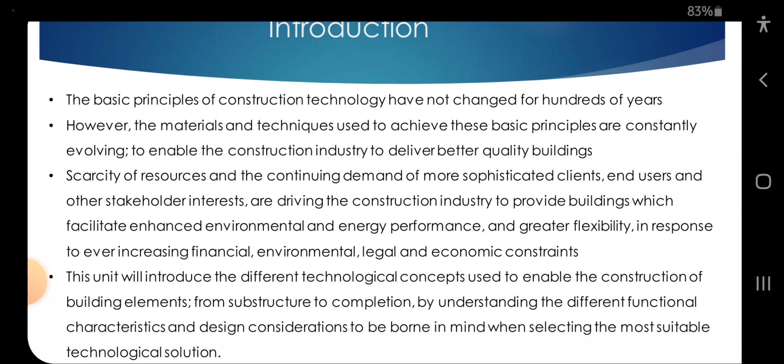Introduction. The basic principles of construction technology have not changed for hundreds of years. However, the material and techniques used to achieve these basic principles are constantly evolving to enable the construction industry to deliver better quality buildings. Scarcity of resources and the continuing demand of more sophisticated clients, end users and other stakeholders' interests are driving the construction industry to provide buildings which facilitate enhanced environmental and energy performance and greater flexibility in response to ever increasing financial, environmental, legal and economical constraints. This unit will introduce the different technological concepts used to enable the construction of building elements from substructure to completion by understanding the different functional characteristics and design considerations to be borne in mind when selecting the most suitable technological solution. Okay, the construction industry, the term construction has not changed.

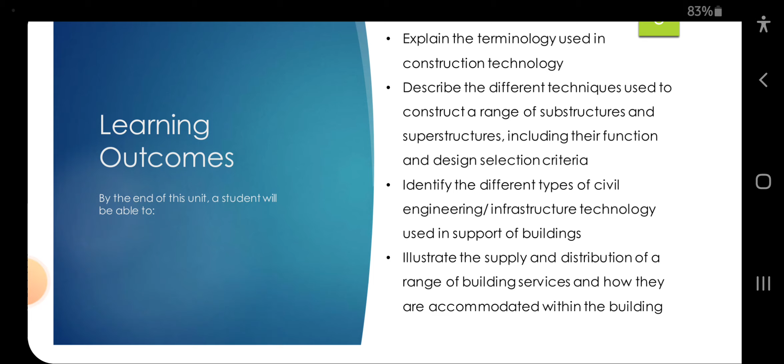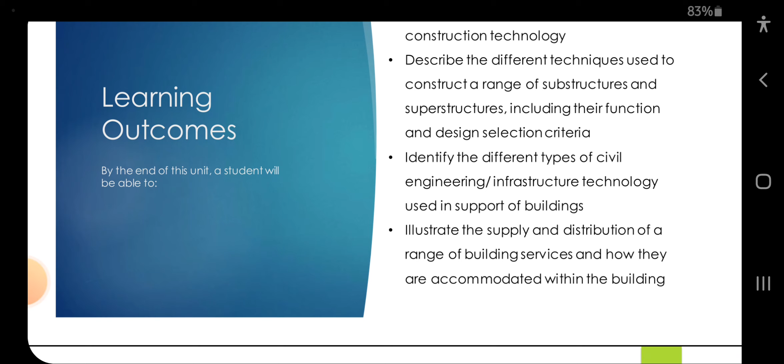Okay, the first most important word in this unit is building. Okay, what do you mean by a building? Permanent or temporary structure consisting of foundation, wall, floors, roofs, ceiling, windows and doors. Permanently positioned in one location. The aim of a building is to give shelter along with security, to protect from wind, rain, solar radiation, snow and so on. Buildings can be load-bearing masonry buildings, reinforced concrete or steel frame structure buildings, or timber structure.

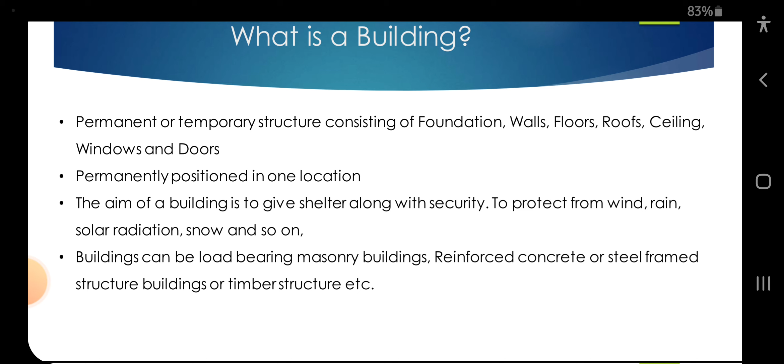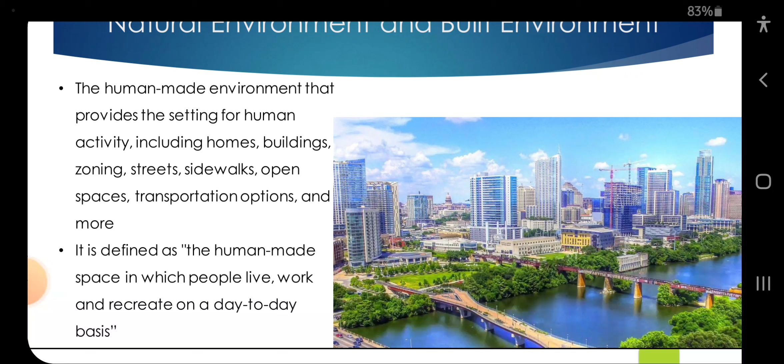Natural environment and built environment. Okay, the human-made environment that provides the setting for human activity, including homes, buildings, zoning, streets, sidewalks, open spaces, transportation options, and more. It is defined as the human-made space in which people live, work, and recreate on a day-to-day basis.

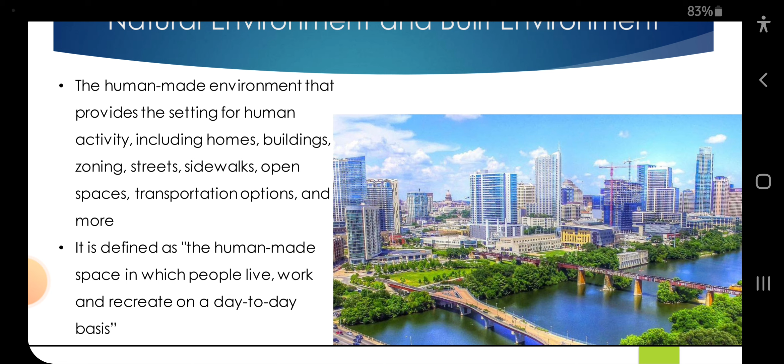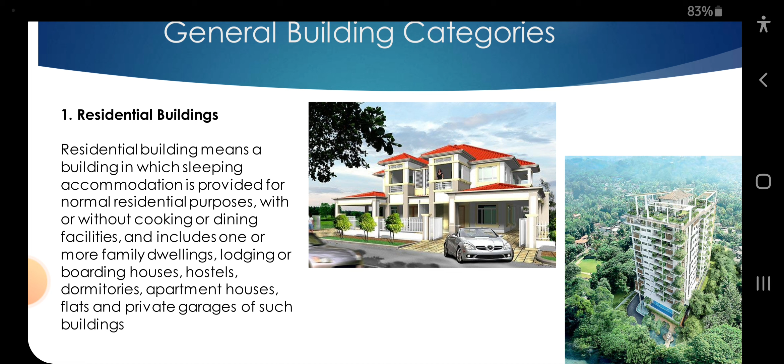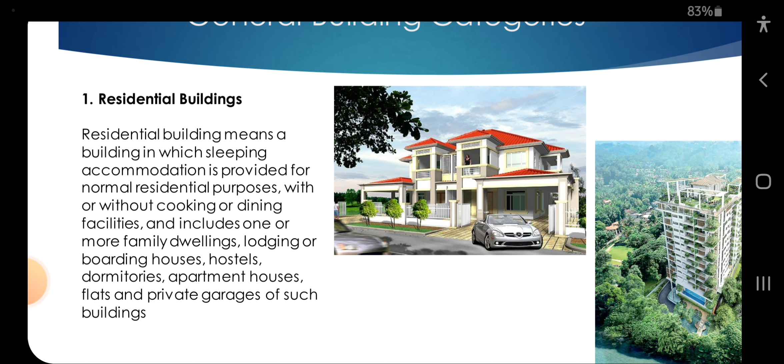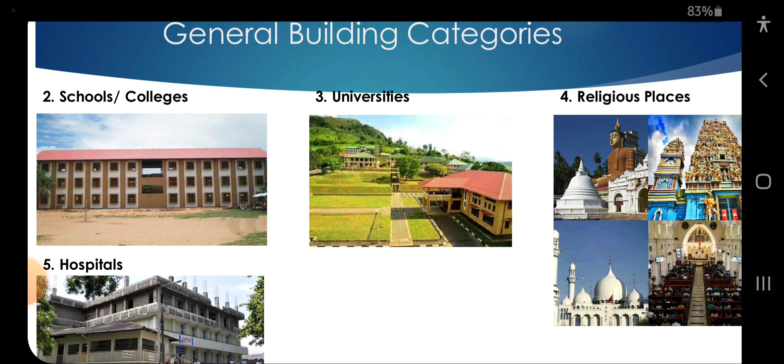General building categories. Okay, let us see some building categories, type of buildings. Residential building. Residential building means a building in which sleeping accommodation is provided for normal residential purposes, with or without cooking or dining facilities, and includes one or more family dwellings, lodging or boarding houses, hostel, dormitories, apartment houses, flats, and private garages of such buildings. Other than that residential buildings, we can identify few other categories like schools or colleges, universities, hospitals, and religious places. Okay, let us come to commercial buildings.

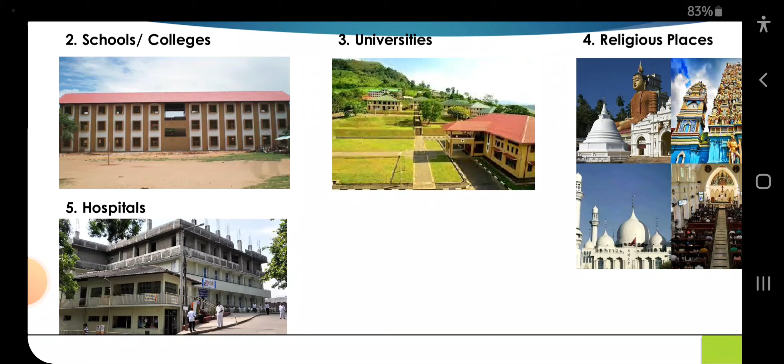Again, commercial buildings are buildings where commercial activities take place. Its floor space is used for commercial activities such as retail, the providing of services, or food services such as restaurants and hotels.

A commercial building or land may also be defined as a space that has the potential for being one that brings in income. If any land or building generates income, then we regard this as a commercial building.

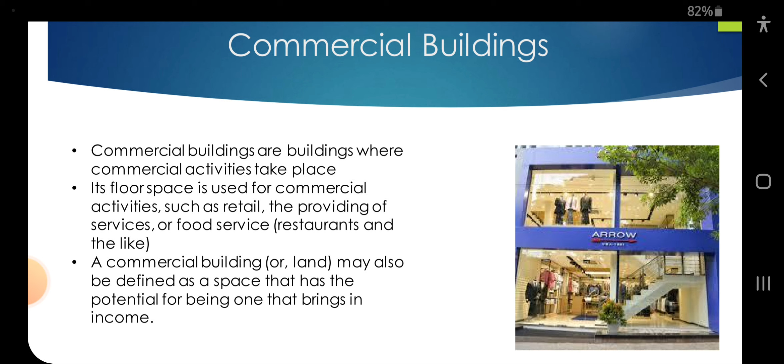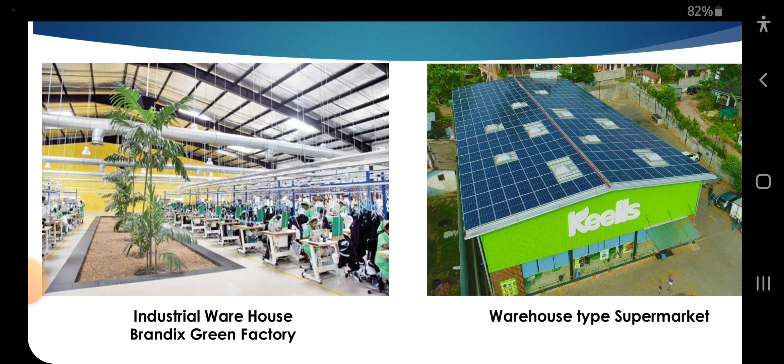So here are some examples of commercial buildings like industrial warehouses. On your left hand side you can see an industrial warehouse picture taken from Brandix Green Factory, and on your right hand side you can see a Keells warehouse, which is a type of supermarket.

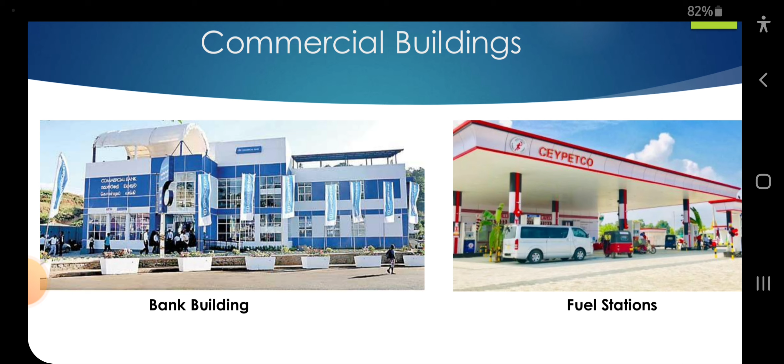Then we come to more commercial buildings like bank buildings, shown in blue color on your left hand side, and on your right hand side you can see a Ceypetco fuel station. That's also a commercial building. You may have probably seen these buildings, and you may have visited them.

Okay, now we have to identify building types. I have categorized them by height and floor area. Up to 18 meters and total floor area less than 800 square meters, meaning the summation of all the areas of all floors, with height up to 18 meters, is low rise category 1.

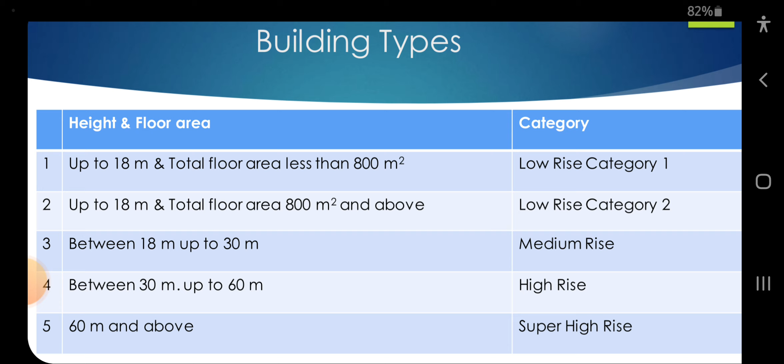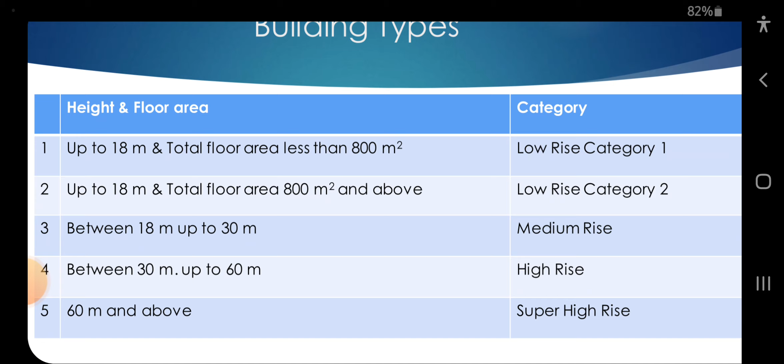Up to 18 meters and total floor area 800 square meters and above, that is low rise category 2. Between 18 meters and up to 30 meters, we categorize them as medium rise. Between 30 meters and 60 meters, that is high rise, and 60 meters above, that is super high rise building. So now you know building types and how they are categorized.

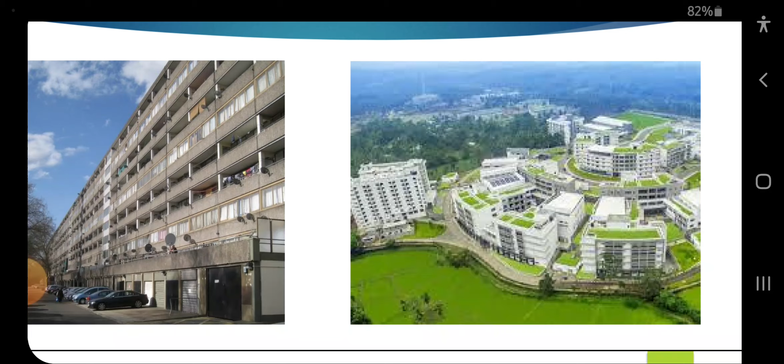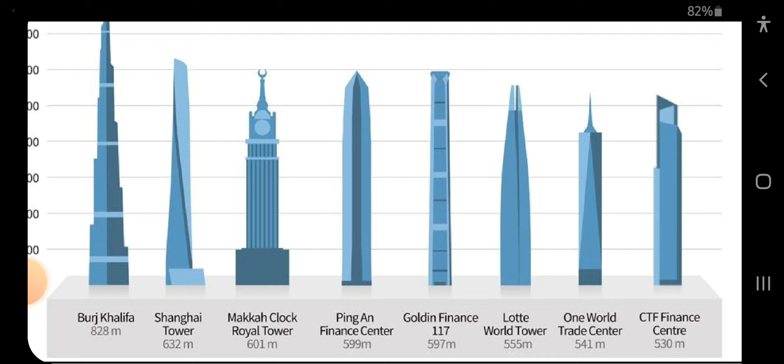You may already know that Burj Khalifa is 828 meters high. Shanghai Tower, 632 meters high. Makkah Clock Royal Tower, 601 meters. Ping An Finance Center, 599 meters. Goldin Finance 117, 597 meters. Lotte World Tower, 555 meters. One World Trade Center, 541 meters. And CTF Finance Centre, 530 meters.

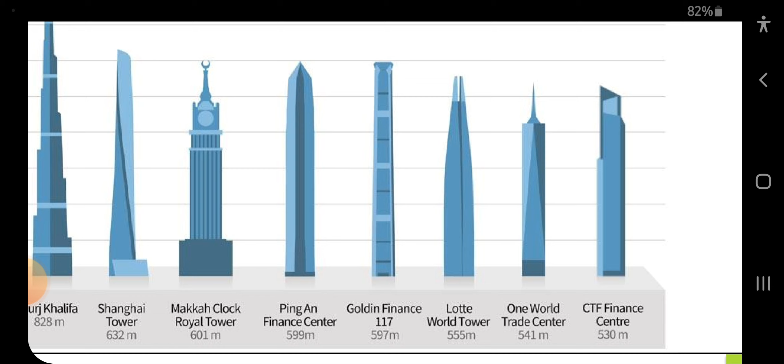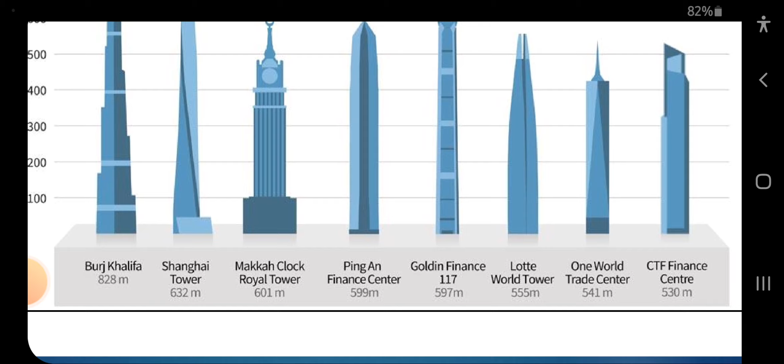You may find more details by searching the internet if you are interested to know more about these buildings.

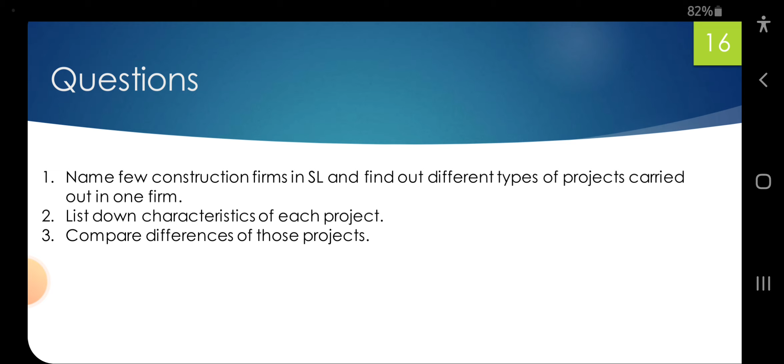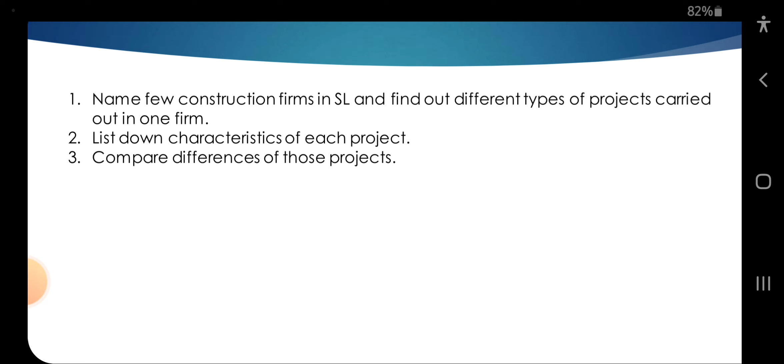Now there are a few questions, so you may think about answering them. The first one is: name a few construction firms in Sri Lanka and find out different types of projects carried out in one firm. Second, list down the characteristics of each project. Compare different types of those projects. Questions 2 and 3 are connected with the answer which you have provided for question 1.

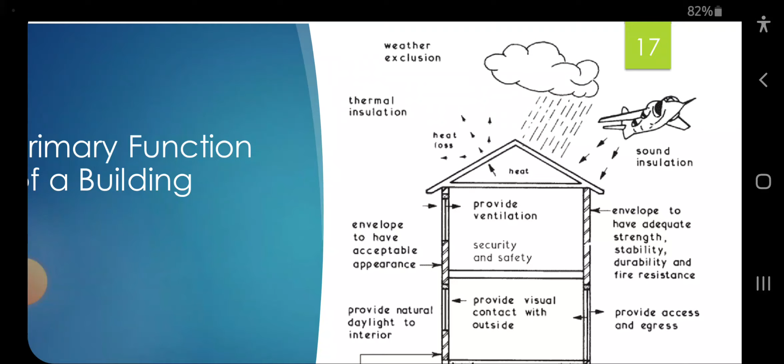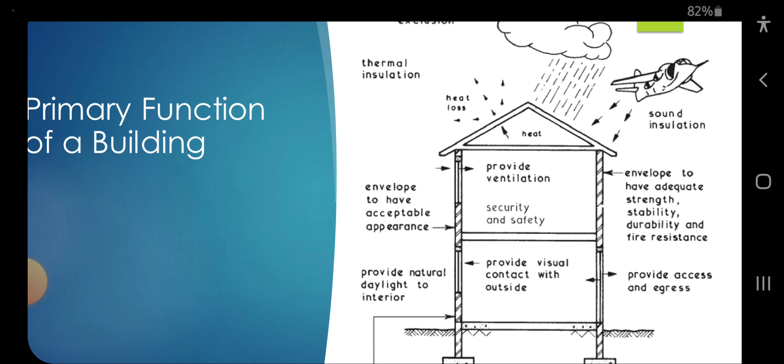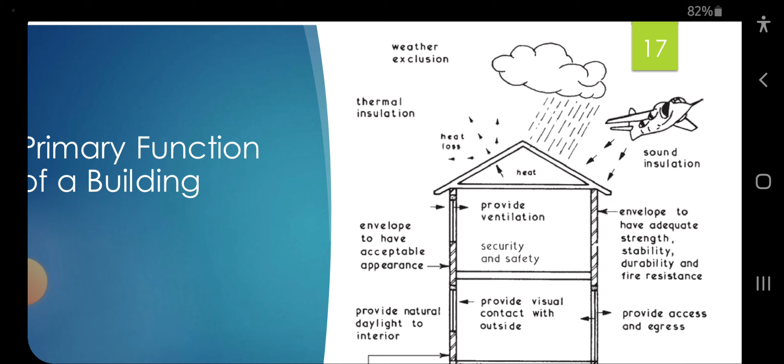Now we will see the primary functions of a building: provide visual contact with outside, provide natural daylight to the interior, an envelope to have acceptable appearance, weather exclusion, sound insulation, heat loss, thermal insulation, and an envelope to have adequate strength, stability, durability, and fire resistance.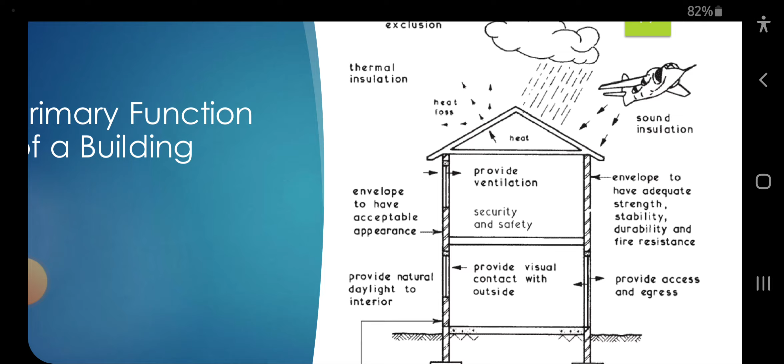Provide access and egress. So these are the primary functions of a building.

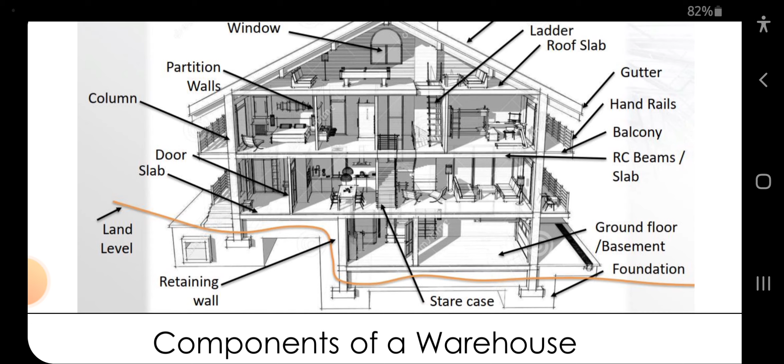Now we will see the components of a building. Here you can see staircases which give access to different floors, doors, slabs which divide each floor, then land level, then below the land level, ground floor and basement, and in the lower area you can see the foundation. This is the basic structure of the building, I mean the substructure, on which the building stands, that is the foundation.

Then the substructure includes the ground floor, that is the basement, and retaining walls to retain the soil coming down inside the building.

Then doors, slabs, then columns. So the basic structure of a building is beam, column, slab. Columns are the vertical ones, beams mean the horizontal one.

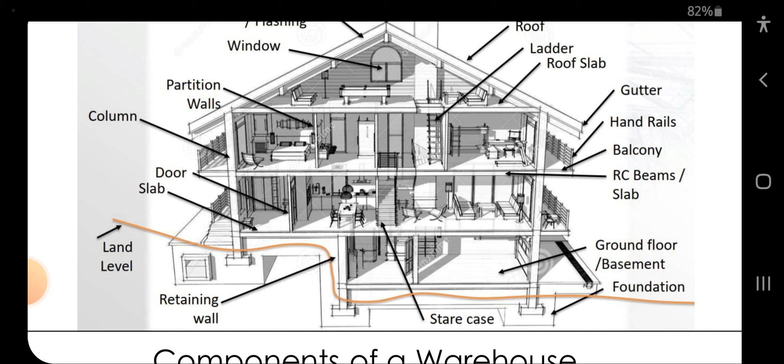Slabs rest on beams. Then ground floor, basement, RC beam, reinforced concrete beam or slab. Then balcony, handrails for safety, and gutters, gutter system.

Then roof slab, ladder, roof to provide covering, then chimney, barge board, window.

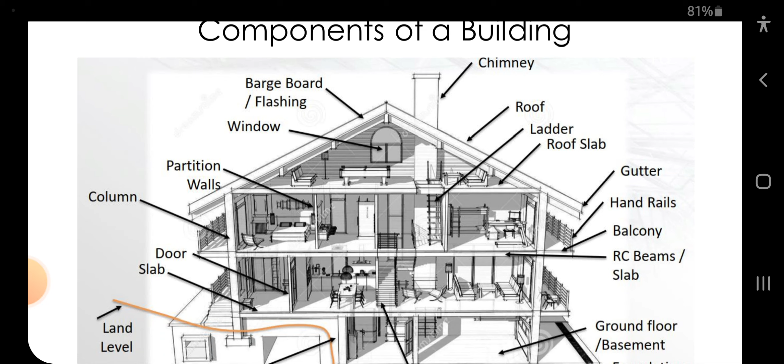Partition wall is a temporary structure, it means it's not load bearing. Then columns, doors, slabs - so these are the things you can identify in this picture, right?

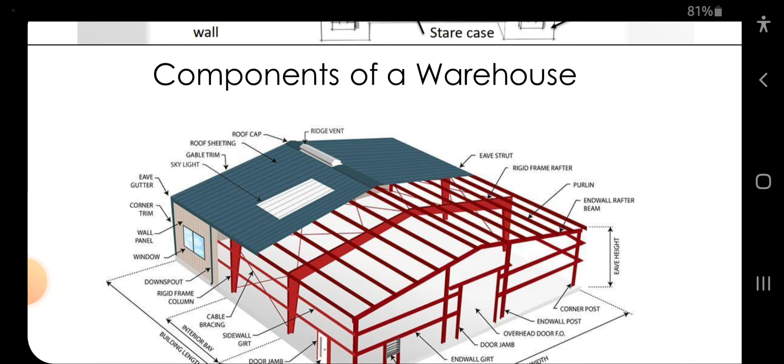Right, then component of a warehouse, a little bit different. So again there are louvers, end wall girt, door jambs, overhead doors, end wall post, corner post.

You can see that steel structures are most cases used to construct this kind of warehouse because it has higher span, 30 to 40 meters span, where we cannot achieve from the conventional column beam structure.

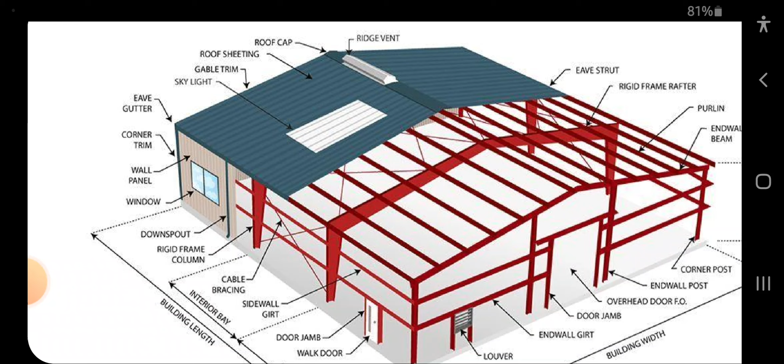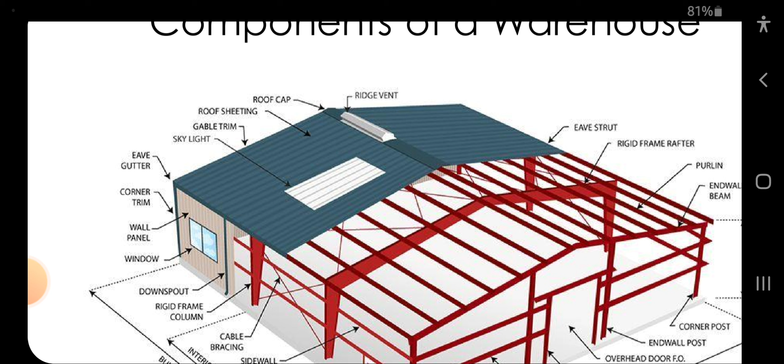Column beam slab structure, right? Side wall girt, cable bracing, window, roof cap, ridge vent, roof sheeting, gable trim, skylight to get natural lighting inside the building.

So you can identify many things, right? End bay, interior bay. Just study the features, right?

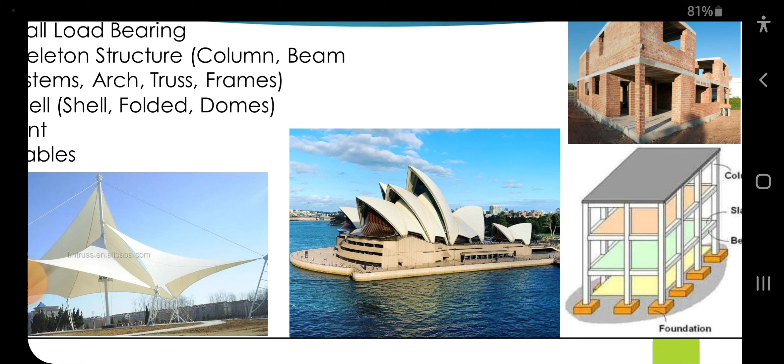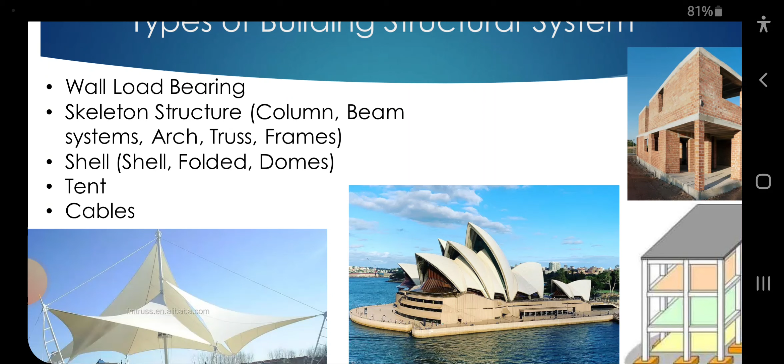You can see in your right hand side down picture a column beam structure, that's a frame structure, and in your left hand side down a tent structure, and a dome structure in the middle, and wall load bearing structure in the topmost picture on your right hand side.

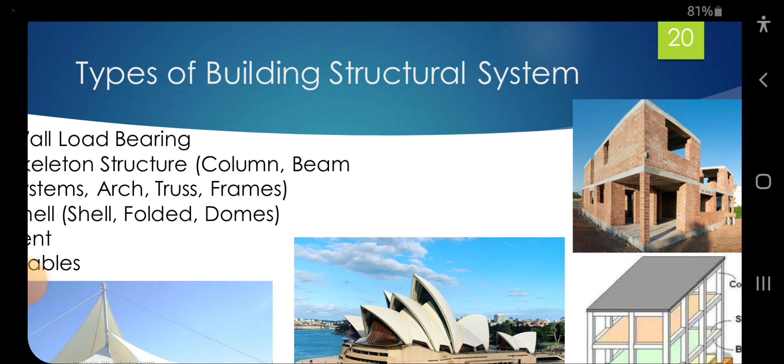So wall load bearing structure - here the wall bears the weight of the structure.

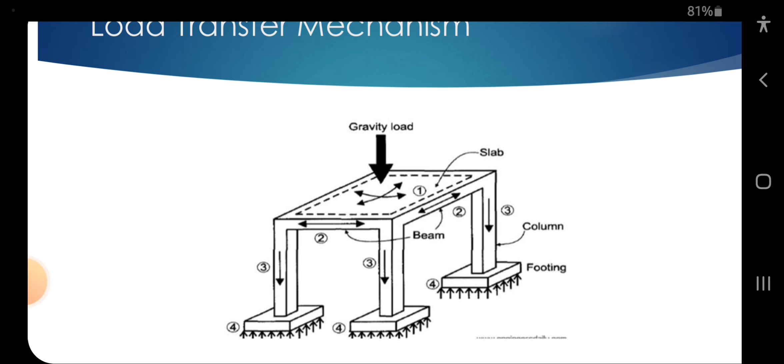Skeleton structure. Frame structure: a building technique with a skeleton frame of vertical columns and horizontal beams constructed in a rectangular grid to support the floors, roof and walls of a building, which are all attached to the frame.

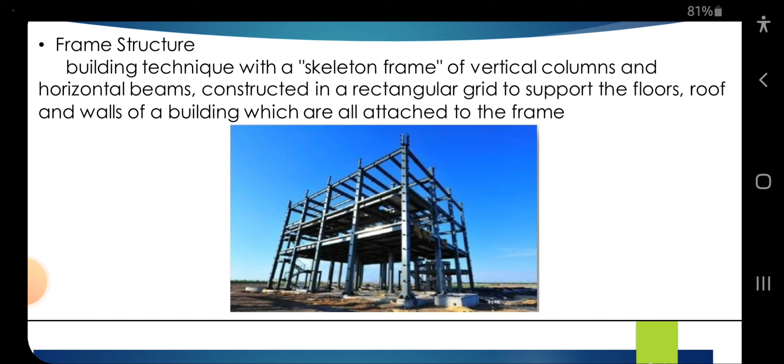Truss structure. Trusses are composed of straight members connected at their ends by hinge connections to form a stable configuration. Because of their lightweight and high strength, they are among the most commonly used to span long lengths.

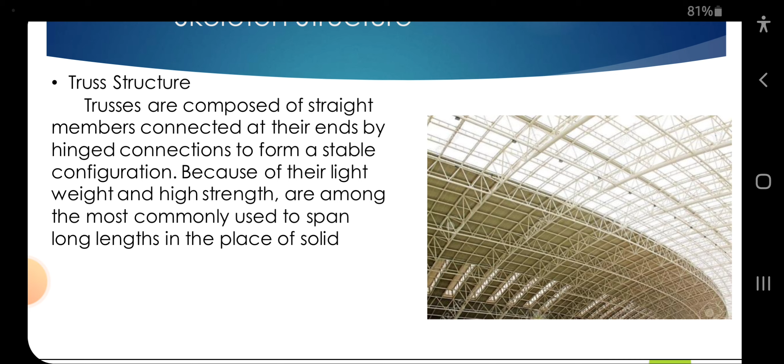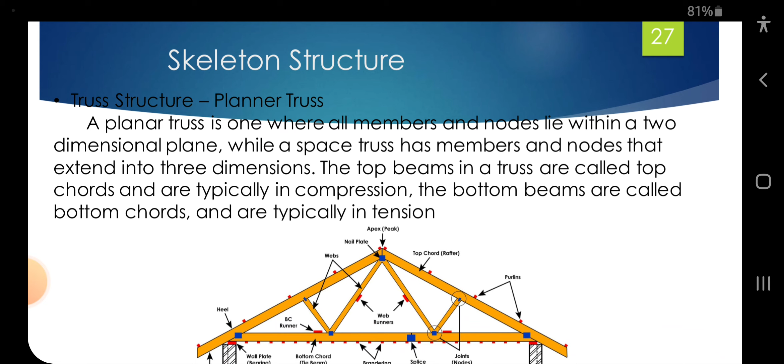In skeleton structure we have truss structure or planar structure. A planar truss is one where all members and nodes lie within a two-dimensional plane, while a space truss has members and nodes that extend into three dimensions.

The top beams in a truss are called the top chord and are typically in compression. The bottom beams are called the bottom chord and are typically in tension.

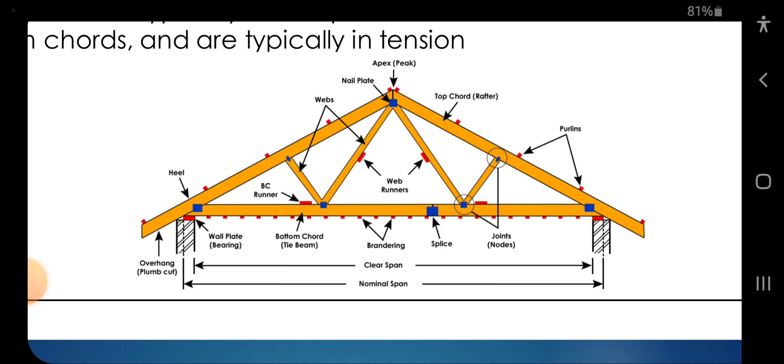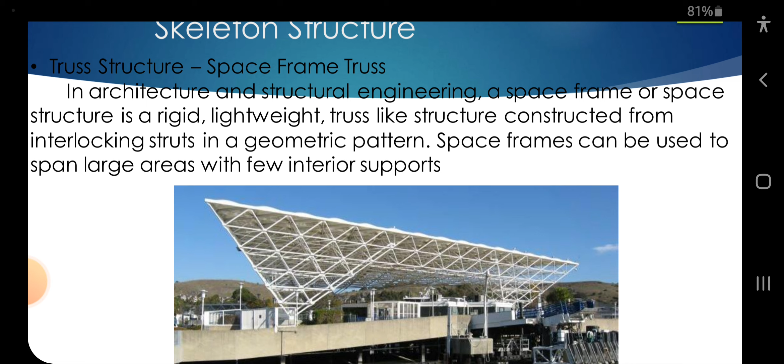Skeleton structure. Truss structure, space frame truss. In architectural and structural engineering, a space frame or space structure is a rigid, lightweight truss

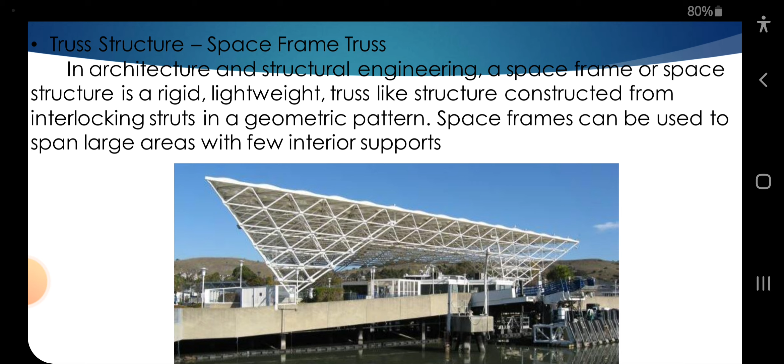constructed from interlocking struts in a geometric pattern. Space frames can be used to span large areas with few interior supports.

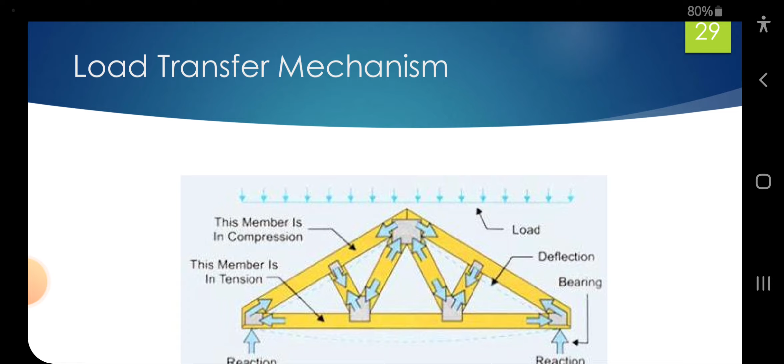Load transferring mechanism. Here you can see the load is coming. This member is compressed, this member is in tension. The top one is compressed, the bottom one is in tension.

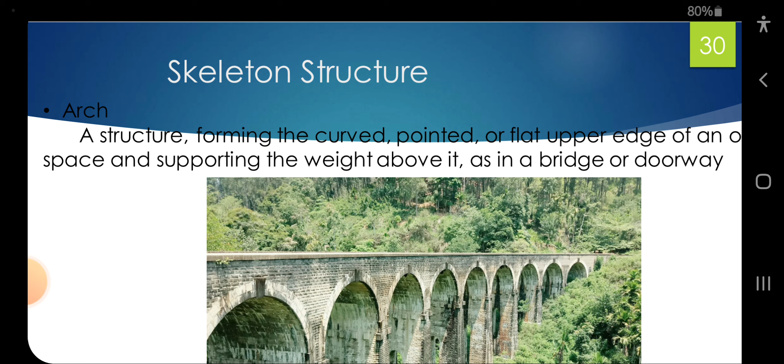Skeleton structure. Arch: a structure forming the curved, pointed or flat upper edge of an open space and supporting the weight above it, as in a bridge or doorway. This is a 9-arch bridge.

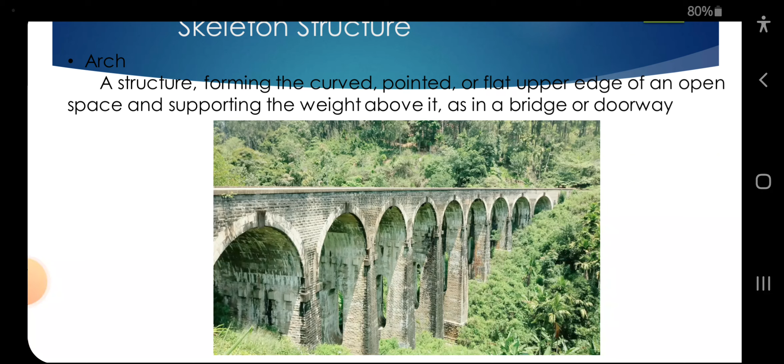Load transfer mechanism in an arch: see, the load is transferred like this. In a skeletal shell structure, these are lightweight constructions using shell elements, allowing wide areas to be spanned without internal support, giving an open, unobstructed interior.

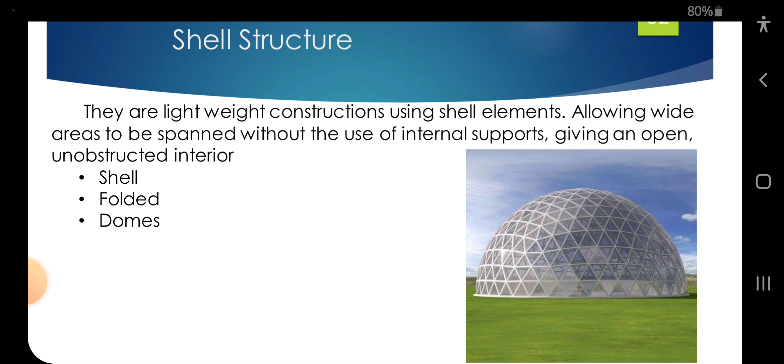Shell, folded, domes - these are more examples. Tensile structures: a tensile structure is a construction of elements carrying only tension and no compression.

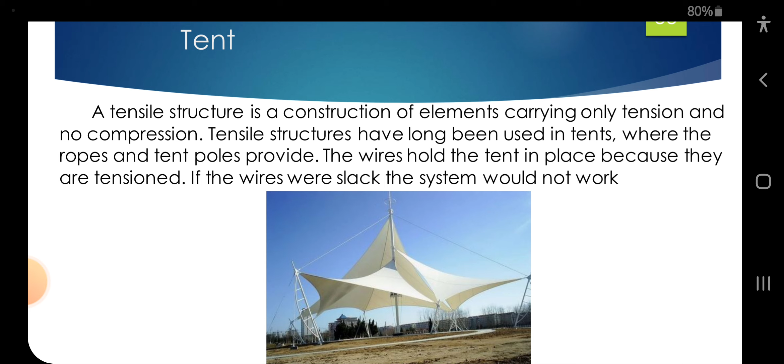Tensile structures have long been used in tents, where ropes and tent poles provided support. The wires hold the tent in place because they are in tension. If the wires were slack, the system would not work - they carry only tension and no compression. That is the difference, right?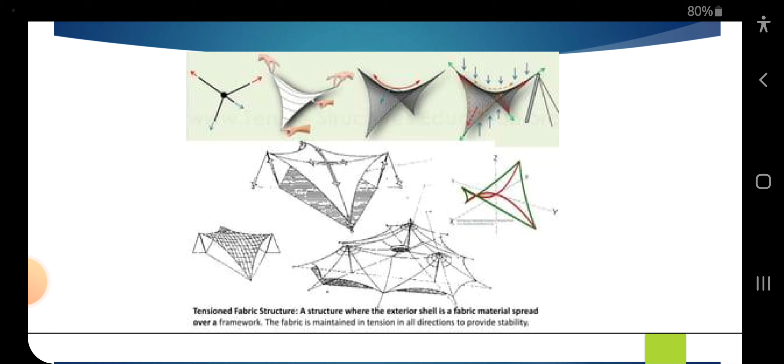Load transfer mechanism - you can see the load transfer mechanism here. Only tension, right?

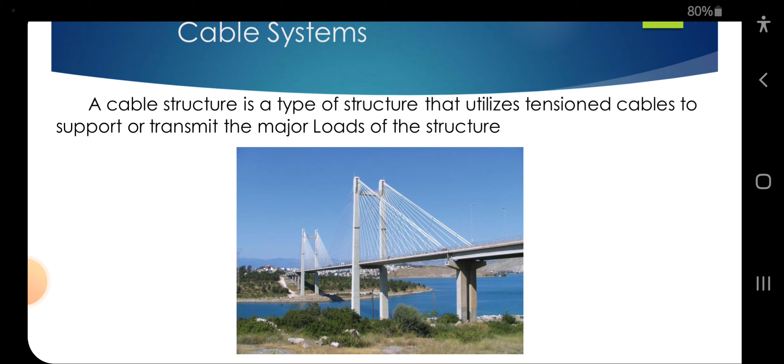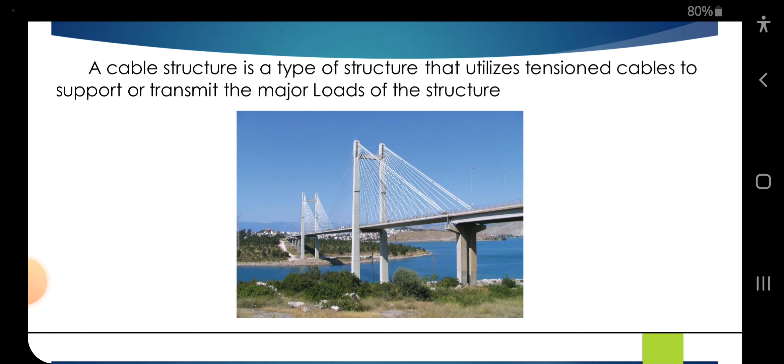Cable system: a cable structure is a type of structure that utilizes tensioned cables to support or transmit the major load of the structure. To achieve a big span, as in this bridge, we use a cable structure where the major load is taken from the cable.

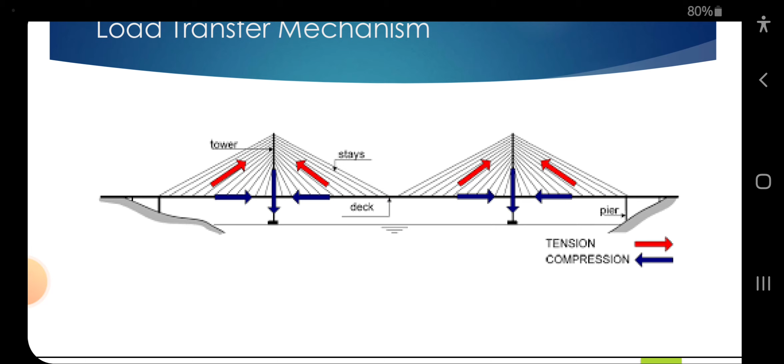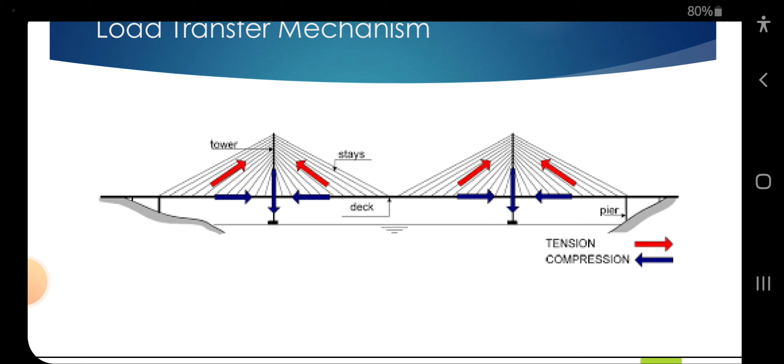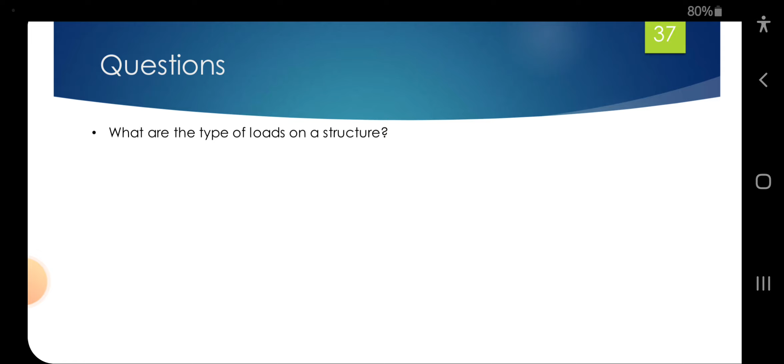Question: what are the types of loads on a structure? You may think about the answer to this question, right?

Okay, these are the things that I had to discuss regarding construction technology of Unit 2 of HND Quantity Surveying. These are the parts of construction technology from Unit 2 of Quantity Surveying that I discussed with you today.